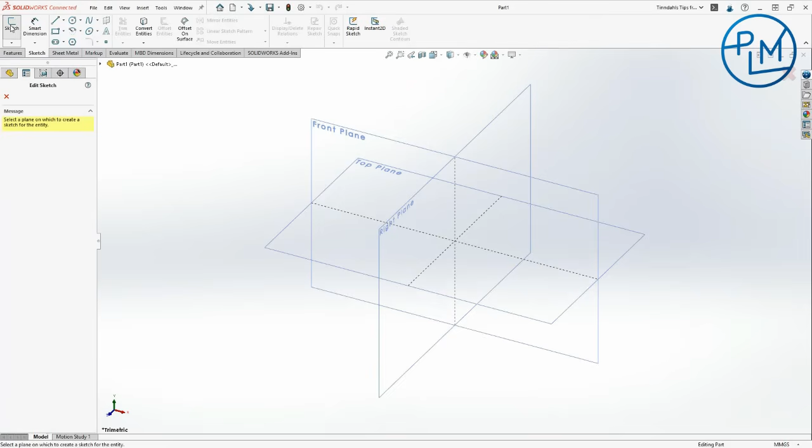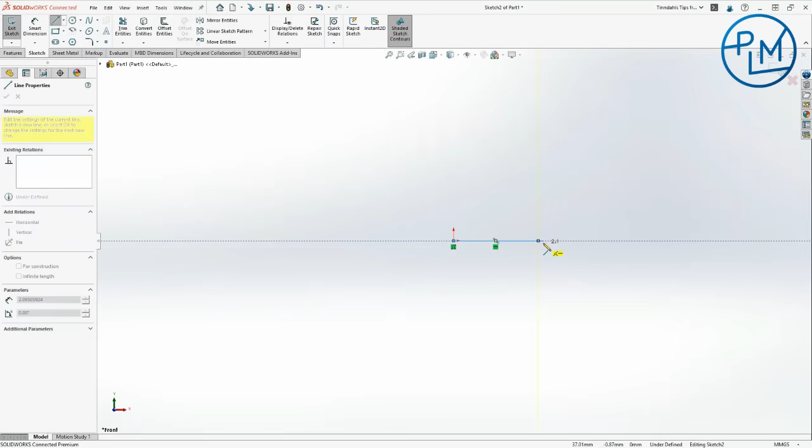Okay. So now I just want to create a sketch. I can of course click here, but I can also create it on the front plane here. As you noticed, it's rotated, and then I'm just going to create a new line by using the shortcut L. So I just create a line here. I think most of you know this little thing where you can just move your line back just a bit, and there we go, then we have the arc.

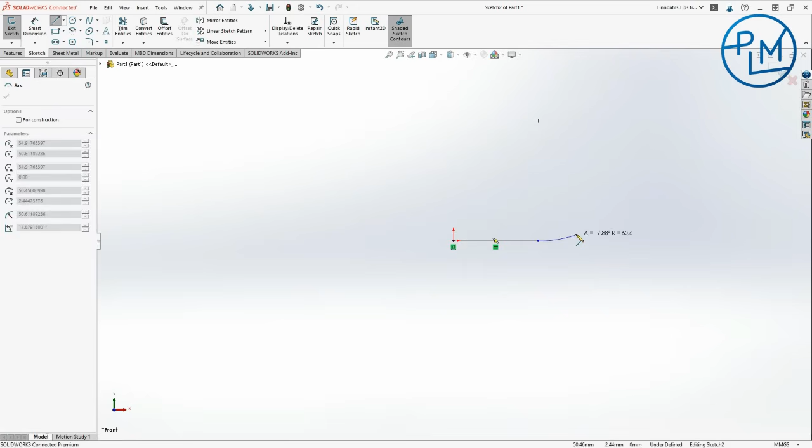Sometimes you cannot always hit it. So what I usually do is just use the A button, which is the shortcut for that. So here, as you can see, I'm just going to create this. There we go. And another line.

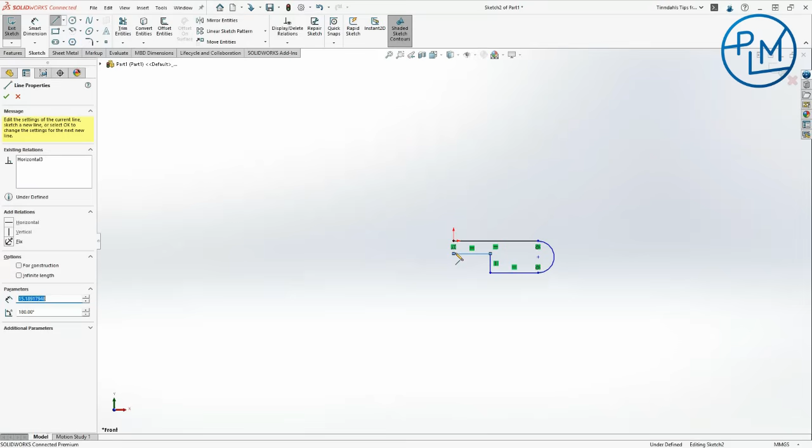Okay. So if I want to create a new sketch, I want to, for instance, use the horizontal. I'm just going to click here. If I hold down the Alt button, you can see on the left side the horizontal and the vertical, the H and the V, are underlined. That means that I can use these shortcuts. So for now, I'm going to use H to create a horizontal line. As you can see, here it starts off horizontal, and if I want to change, I can do that also. So there we go.

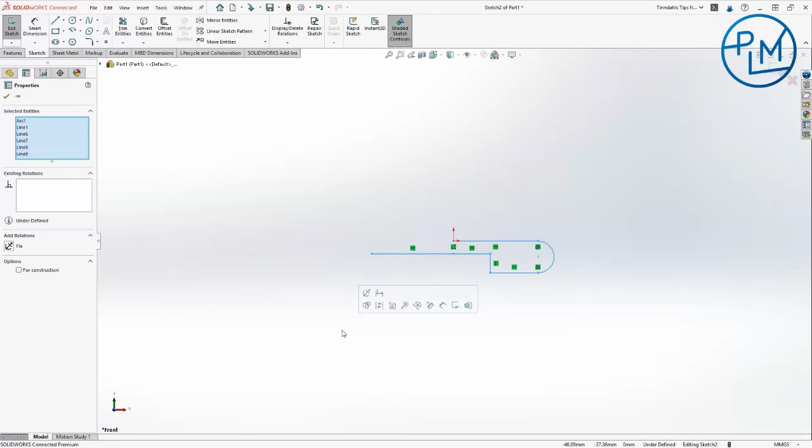If you want to move your sketch, I can of course click here and then go up to move, copy entities. However, I'm a bit lazy, so I'm just going to use the shortcut. To copy a sketch, I can just select everything, hold down Control and drag it. There we go. And instead, if I want to move it, I can just select it all again, hold down Shift and move it.

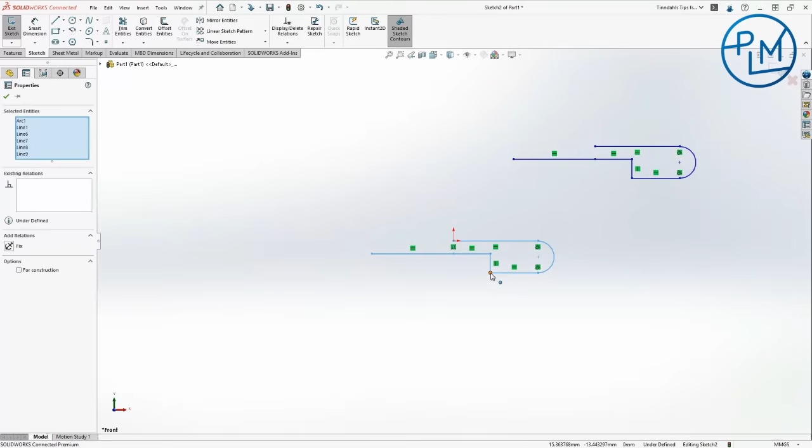One thing to notice here is that it keeps the constraints that you have created, meaning I've constrained it towards the origin, which means if I try to move this, it will stay locked to that. I'm going to use this in a minute.

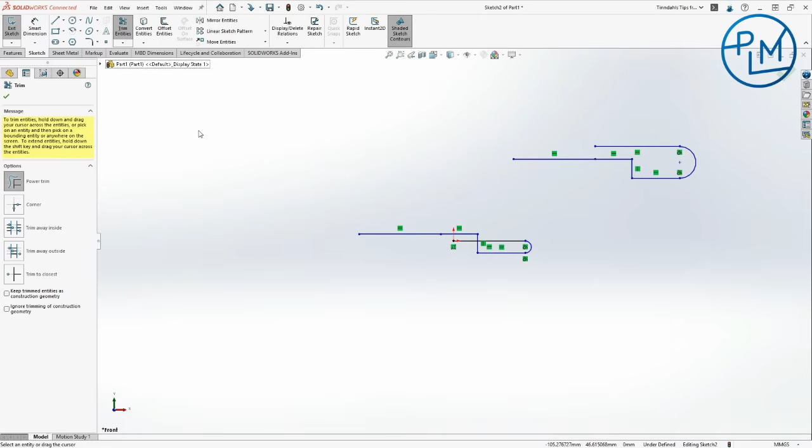Okay. Next up, there is the power trim. The power trim tool is also very efficient. Let's see how we can do this best. I'm just going to move this. Hang on. I'll hold down Shift and move. There we go. Good. So the power trim, as I said, is a very powerful tool. You can of course use it to just drag here and there.

But you can also use it the other way around by using power extend. That's just by selecting the power trim, holding down the Shift button and using extend. These are just some quick ones from my favorite tools here.

I'm just going to check. Nope. The camera's still not working for some reason. Okay.

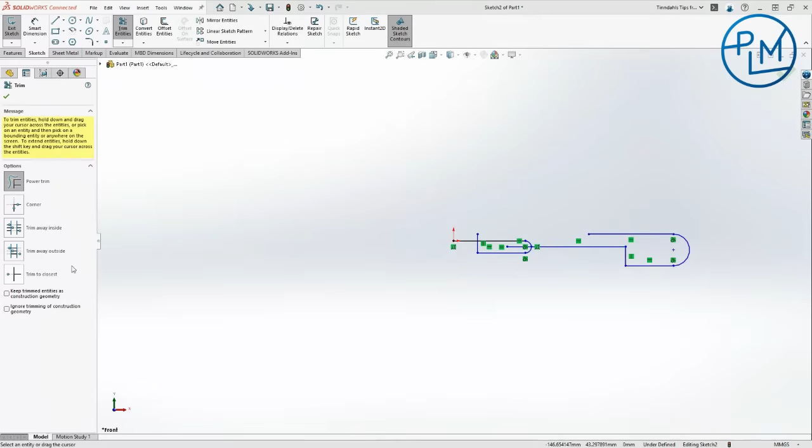So if we just move, okay. So what I want to do now, I want to just show you, I have created this chessboard. For this, I want to create, well, not a functioning clock, because let's be honest, we don't have time for that. But I want to create a clock just to have it to look nice.

So let's see. Go back to our sketch. Okay, so if I just create, this just shows some of my tools. So first, before we do this, I just want to go back to my options within Sketch and enable these ones, so I can get to do a dimension. And I want to create dimension every time.

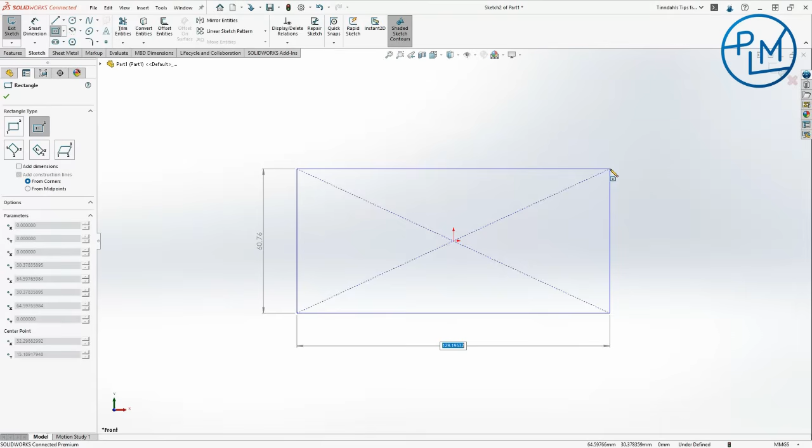So if I go here, and so here we go. Here, I'm not going to use that. I just want to have this one. Just press tab and I can switch between the two dimensions here. And this one I'm going to add to 300. Okay, so that didn't create a dimension, as I hoped. There we go. So next, I want to make sure that the height is always half the length of this.

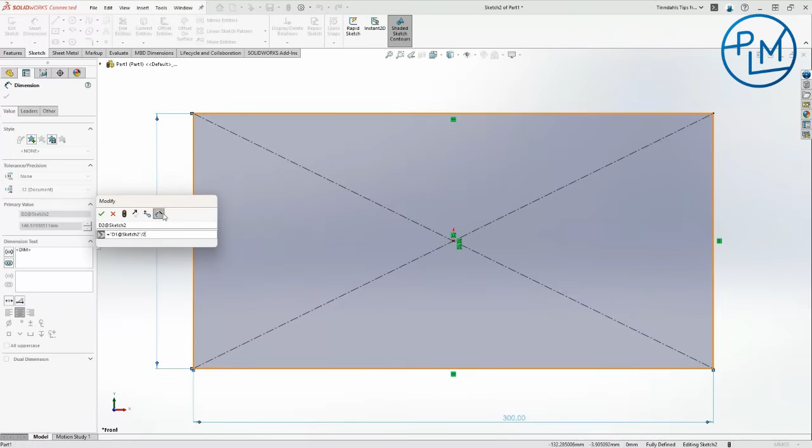So I'm just going to click here, equals 300. And by doing this, it will become a very dynamic model that I can easily change if I want to. So just going to do divided by 2. And okay.

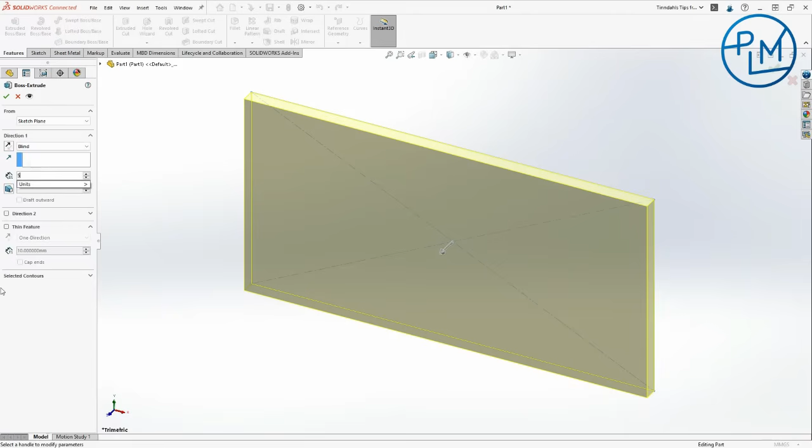Next, I will just be using the extrude boss base feature. Now, I want to create a hollow box for this. So, of course, I could use the thin feature here with one direction, but we're just going to make this, I think 50. No, I think 150. If I want to create a thin feature here, I can also use cap ends, of course. And I just want this to be, I think 5 millimeters would sound good.

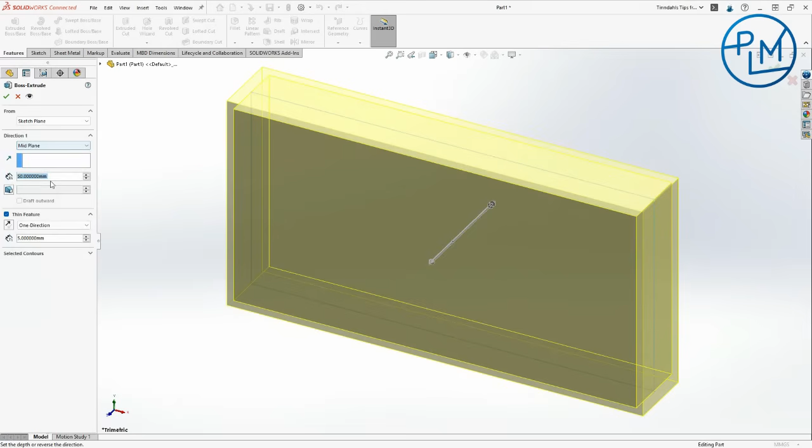Good. I want to create a cap end, and I want to do this in 2 directions. The reason why I'm doing this is because for some reason we can't use cap ends when you have the mid plane feature when using thin features. So I'm just going to take one direction, blind, and there we go, and cap ends. That's good.

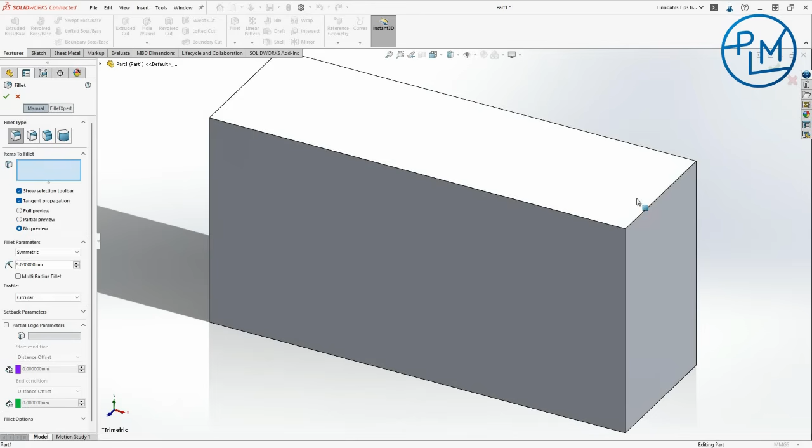Okay, next, I just want to add a fillet here. So if we go fillet and we say 5, I guess that would be good. Just going here and here. I want fillets all the way around here, so I'm just going to say okay, and there we go. Hang on, I think I just made this too small. Going back, so I'm just going to make this 75, I'm saying 100, yes, and 100 again. That looks better.

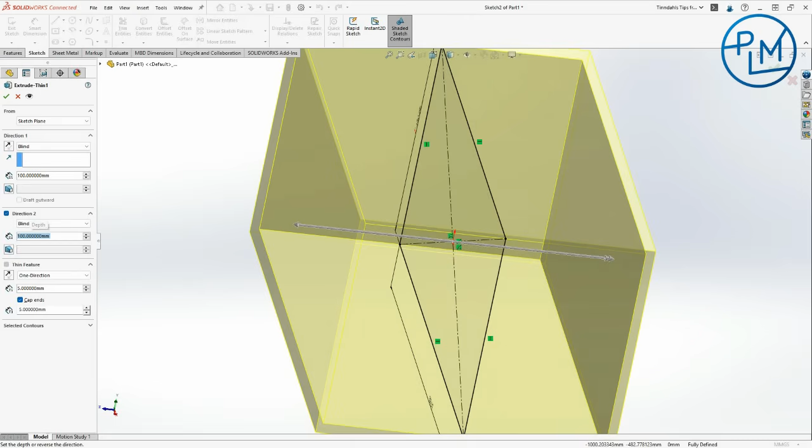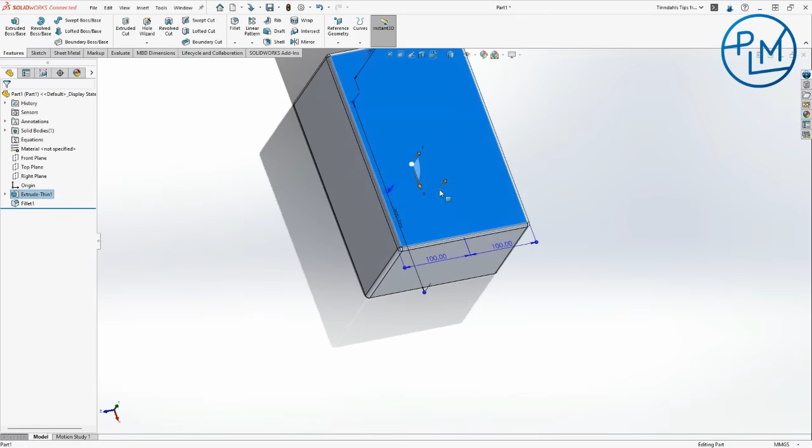Now, within this clock, we can see that this is in fact hollow. In this clock, I want some faces, and I also want some buttons on top of it. For me, I actually want to see if I can use the same sketch for both these holes I want here and these holes I'm going to have here. To do this, I'm going to the top plane and creating a new sketch. There we go.

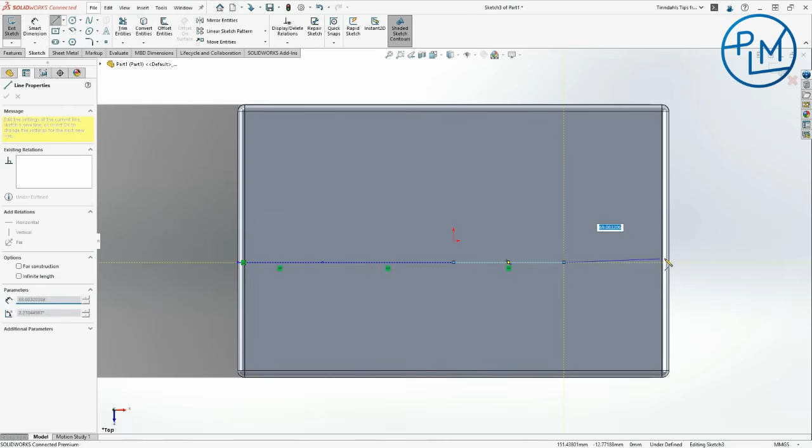So normally what I would do is to create a sketch with, there we go, with 3 points here. And then just make these equal. And I'll make this 15 millimeters. Oh, not 150, 15. 15 millimeters.

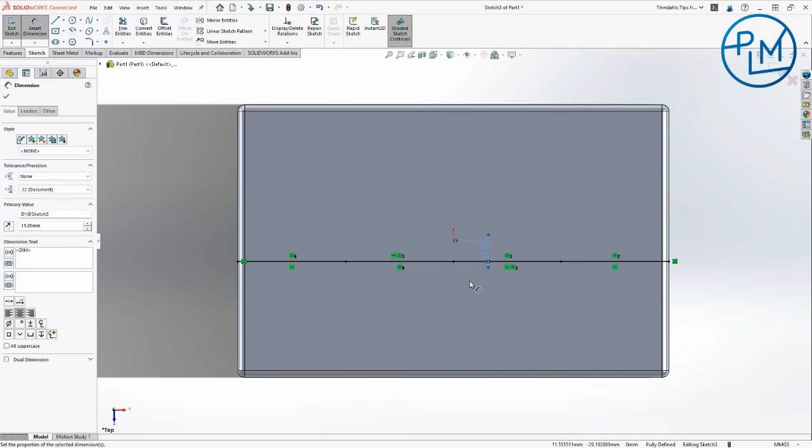This was my previous way to do it, but, I'm sorry if I don't pronounce this correctly, someone asked if I could use a segment line, and of course I can. So instead of that, I'm just going to create one line from this point to this point and make it 15 millimeters.

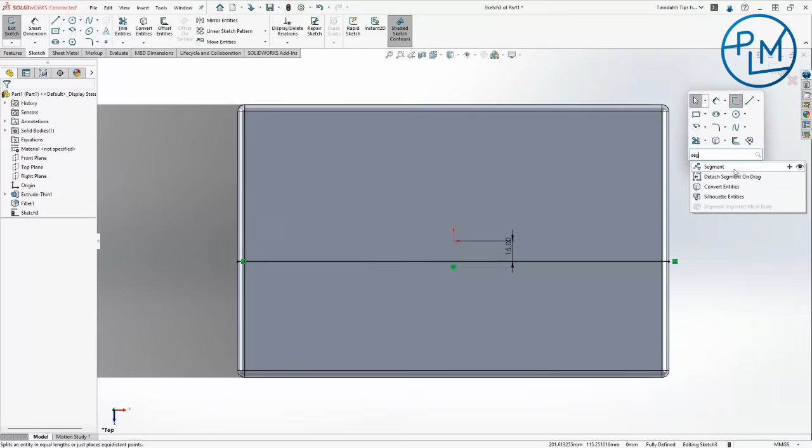What I can do now is I can use a segment. Okay, I'm just going to find that segment line. Let's see here. It's a segment here. And I want 3 points as I had before, so I'm just going to add 3 points. There we go, and that's it. Now this is still one line, but I now have 3 points I can use for my sketch, as I will show you in a minute.

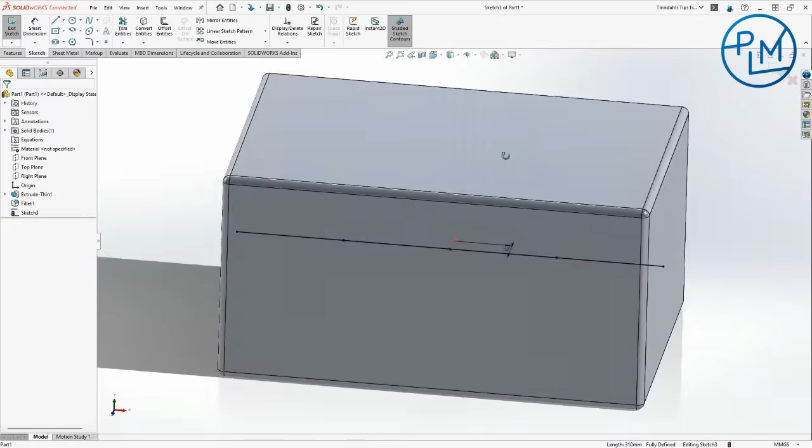So this is basically in the middle, and here's 15 millimeters from the middle. So if we just say okay, and then we're just going to create a new sketch on the front plane. Here we go.

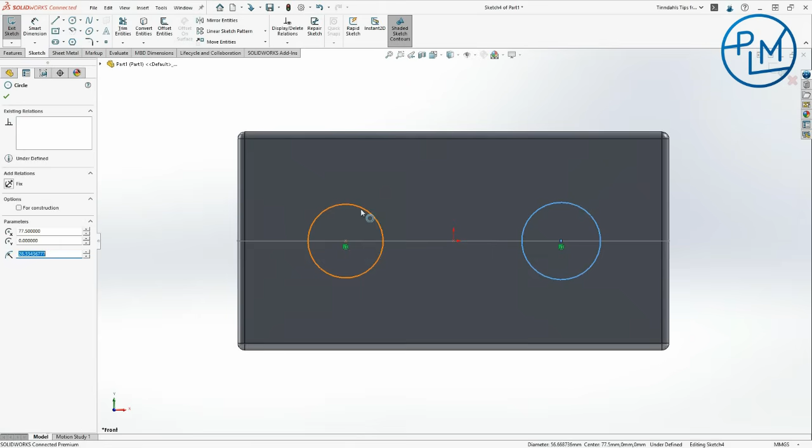Again, we have multiple ways of doing this. The first one is, of course, you can use, create these two and make them equal, and just add the measurement to the one here. Let's go to 100.

If I create this, the great thing about using this is I'm not dependent on any sort of face. So if I remove some faces, it's not an issue. I'm just going to use this from the plane.

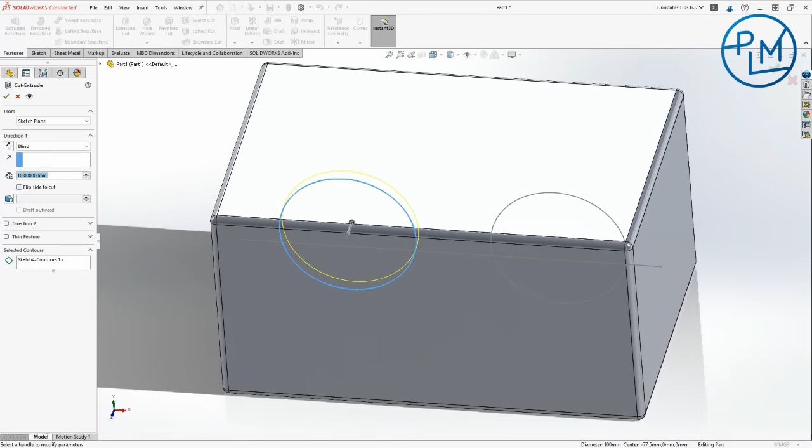So if I use an extrude cut, there we go, just want both of them. And we say through all, and the other way around, thank you. There we go.

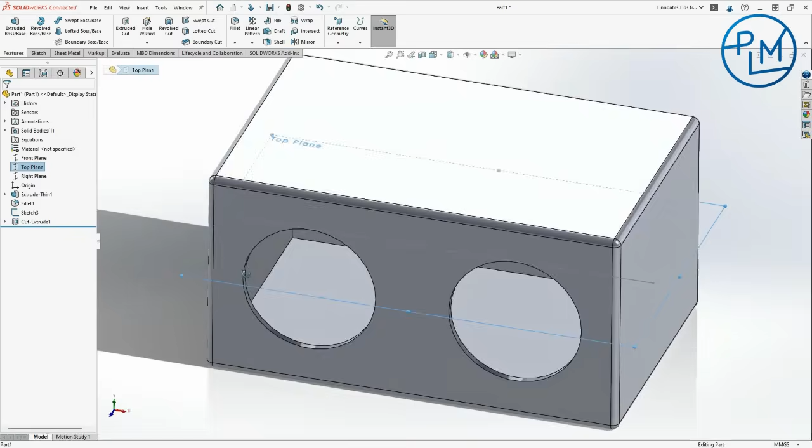Now, for the top, I want some holes for buttons for the clock. Here I'm just going to look into the top plane again. And if we just create a new sketch, it will rotate nicely. So here I'm going to create one sketch.

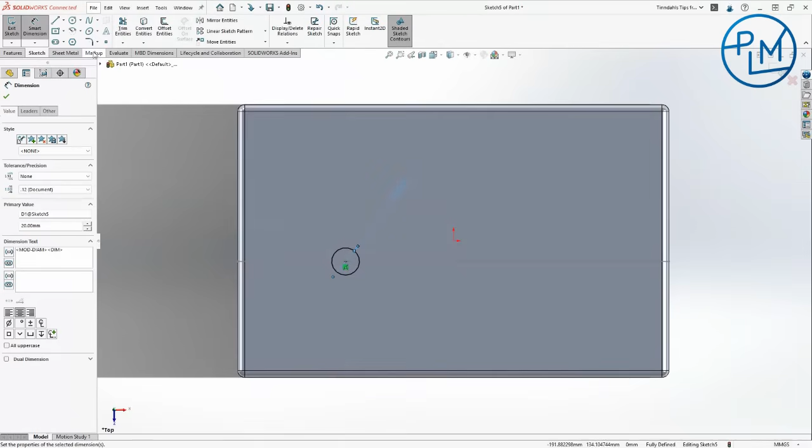This is another way of doing it. I'm just going to add a measurement. I think I'm going to use 20 millimeters. Instead of just doing another one, I can also use the mirror entities, so I can mirror that.

I'm going to mirror this with the right plane. Oh, there we go. The right plane. And there we go.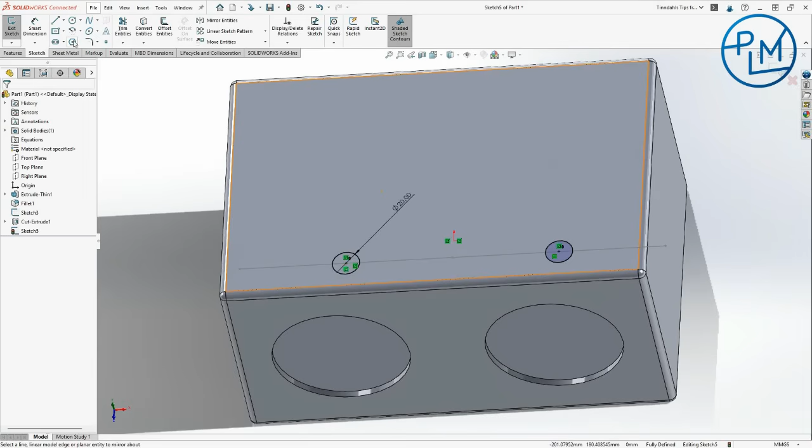Again, I'm using the plane, not the face, to do my sketching. This will also make it easier when in another exercise I'll show you in a minute. So again, extruded cut, and that way through all. There we go.

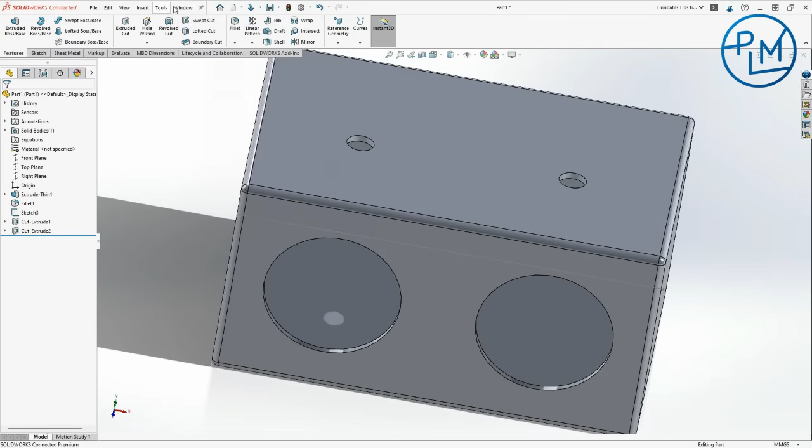What I want to show you next is I have, of course, cheated a bit in advance. So I have created one called Replace Entities. This is basically the same, as you can see, but now I have added a few things to my sketch.

As you all know, designers can sometimes change their mind when it comes to sketching. So if we look at this sketch here, you can see that there's a few other suggestions on how to create this.

Clock. Now I can of course just say okay and make this so like that and like that. Oh, there we go, there we go. And for construction, so we have that.

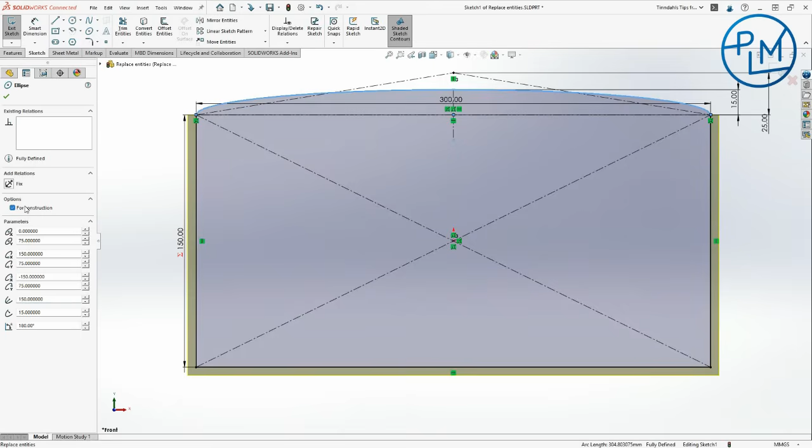Now as you can see, this does not work at all. There's something so wrong here. So I'm just going to go take that away. Okay.

So instead, what I want to do is I want to use the Replace Entity button. So I think I have it here. Oh yeah, there we go. So the Replace Entity, I can select this, and I'm going to make that a construction, and this one I'm going to make that a contour, and then just press that one and say okay.

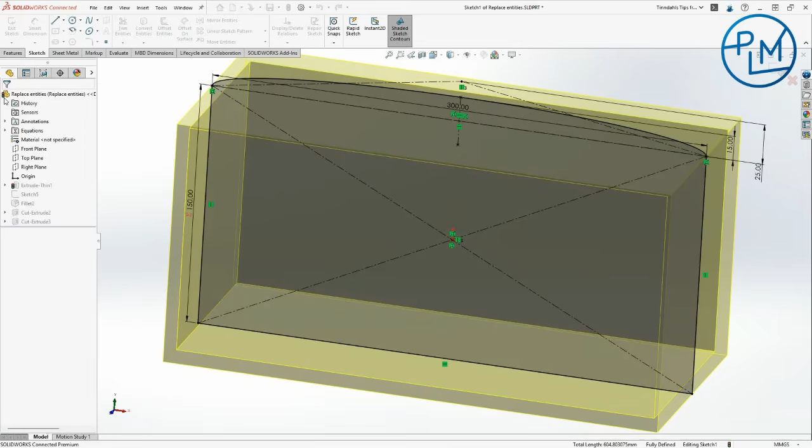So now we have created another look, and this actually also works. That's also very good. But what happens if we just go back a bit? And there we go. But what if I want to use this one?

This has only one line, so I'm afraid that that's one limitation. You can't say, for instance, segment. You can't say replace, and then you can replace one entity with multiple. So what we're going to do instead, we're going to go into the Tools section and go into Sketch Tools, and we're going to use, see if I can.

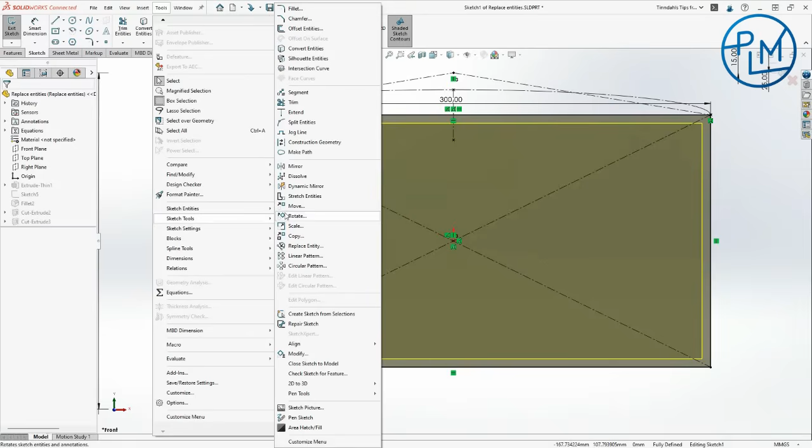We're going to use Split Entities. This actually gives me the option, so I can just say okay, I want to split my entities, for instance. It doesn't matter, actually, where I want to split it, as long as I have the same number of lines. So I'm just going to split that. Okay, now my line is 2 different lines.

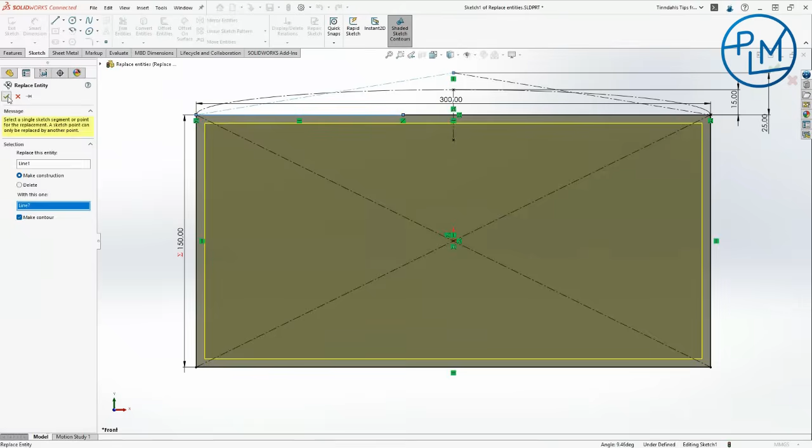So that's ready. And if I take my Replace Entity, I can say I want this one. Make construction and make contour, great, and that one. Okay, and again, this one replaced with that one.

So as you can see, we already changed the look here. Now, as you will, of course, notice, the fillet does not appear on that. That's because it's a whole new face that has appeared.

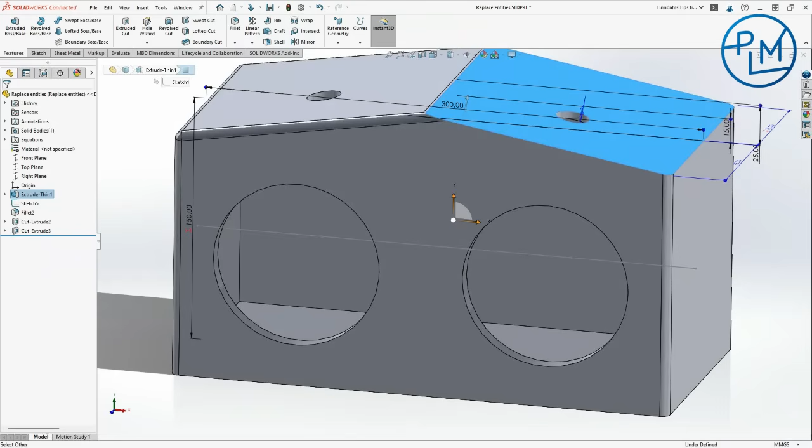So instead, we just need to correct this. I can, of course, do this. Let's take a drag and drop. Okay. Nope. That's it. So if I just take this and see if I can do that.

Yeah, there we go. Just hold down Control and drag and drop it. Then you can, okay, then maybe we got it too much here. So we're just going to go here, and then we need to.

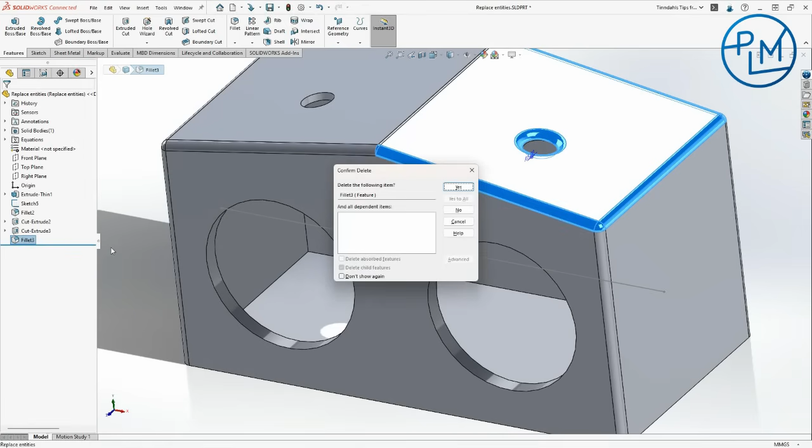So what we can do instead, so that's not good. So what we can do instead, actually, is just we take this, delete. So we just roll back, take our fillet and drag it on, and then just create our holes.

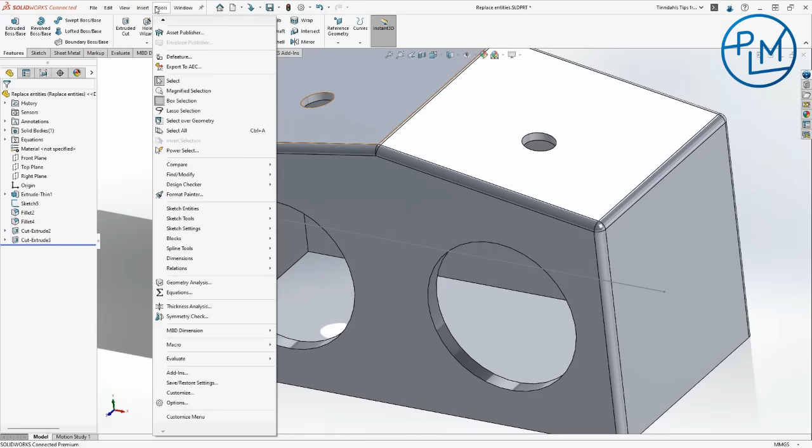So that is one way to use replace entities. Another way that I actually want to show you is one I actually think is very overlooked. So as you may have already guessed, I have already created a chess timer here. That looks nice. So if we look at, see if I can find it here.

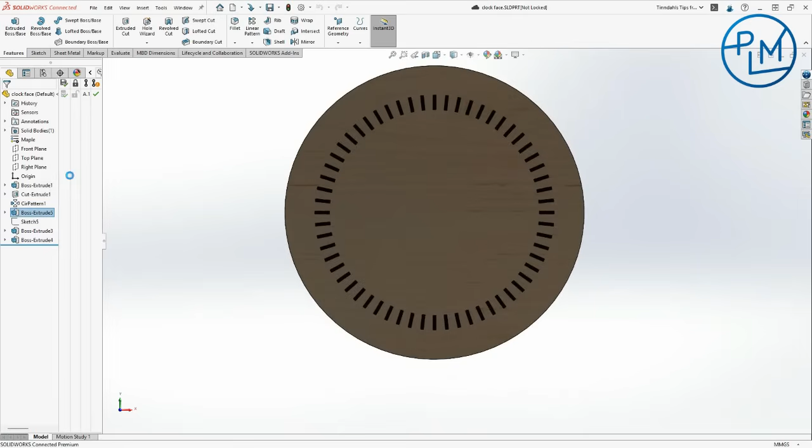Okay, so since if we look at, let's take this one, let's go to the example. So we have the circular pattern, and there we go. Yeah, so one thing you actually can use with this, if I just go, actually use it to...

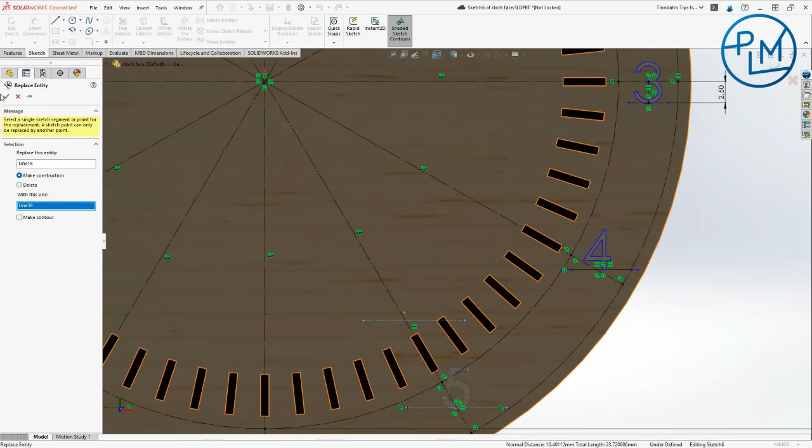Change your text also. So if we just go here, and if I take, for instance, if I want to move this up here, I will just use the replace entity again. So that one, and I'm not going to make it contour, it should still be like that. And there we go. As you can see, it's a much easier way to move your text file if you want to, but I'm not going to use that here. So just go back and okay.

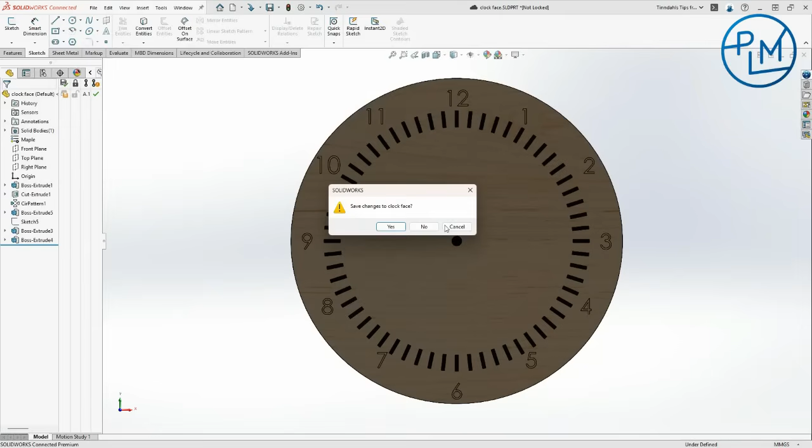So moving on, let's look at this clock that I've already created. I'm just going to go back here, shut this down. Nope, don't want to change anything.

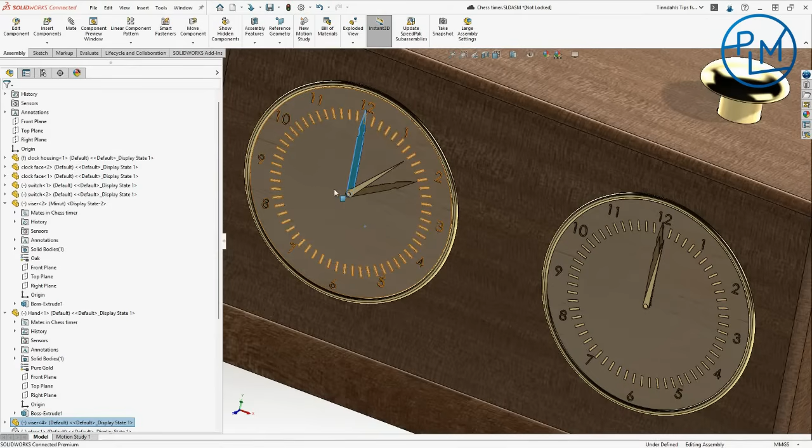Okay, so this clock face, as you can see on this side, I've already created - hang on, that's the second hand. As you can see here, the second hand, the minute hand moves one minute whenever the second hand moves a whole round. And the same thing also goes with the hour hand. If this one moves for one, there you go, then we just move for, as you can see, it moves exactly like a clock. I don't have an animation with that, but it should be doable.

Now, what I want to do, I want this clock, I want this one. As you can see, I've created an easy way to make these two move, so when this one stops, that's basically how a clock works, that you get to start it. So if we just go to our, I'm just going to delete. So there we go, okay.

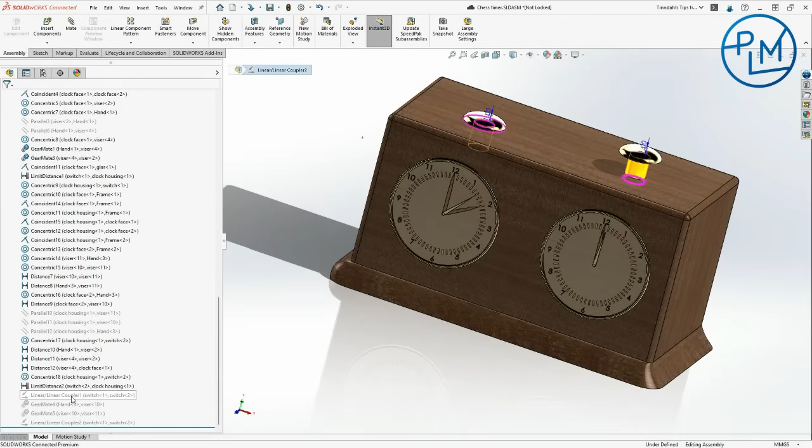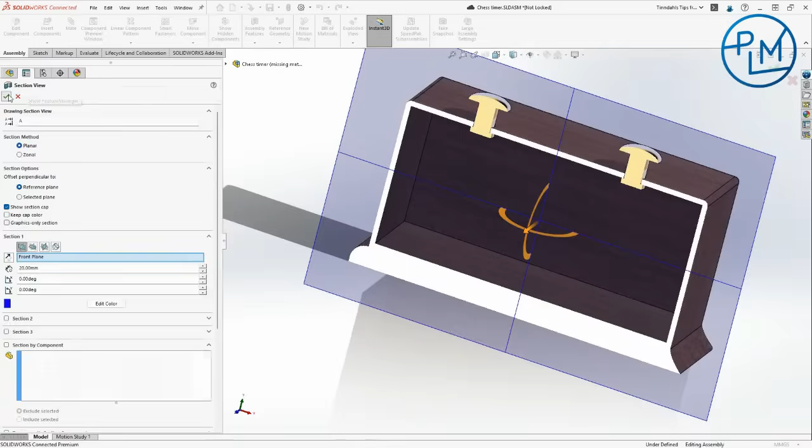So how do we do this? As you can see here, I've created a limit distance mate here. I'm just going to make this. There we go. And yeah, so as you can see here, I've created a limit distance that only allows it to move this close. So there's a limit there.

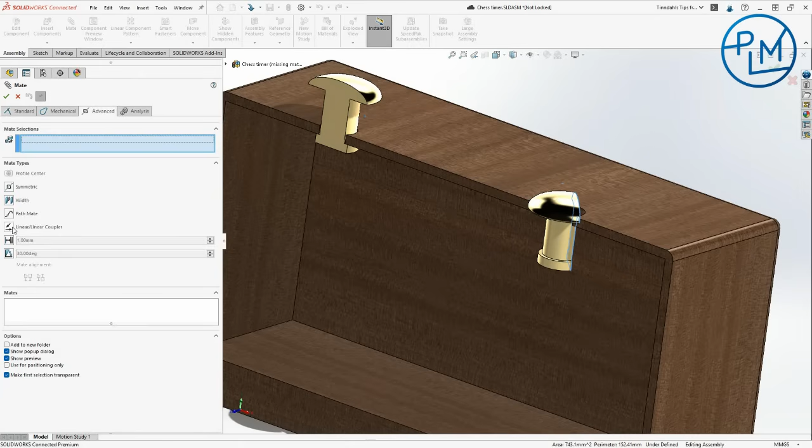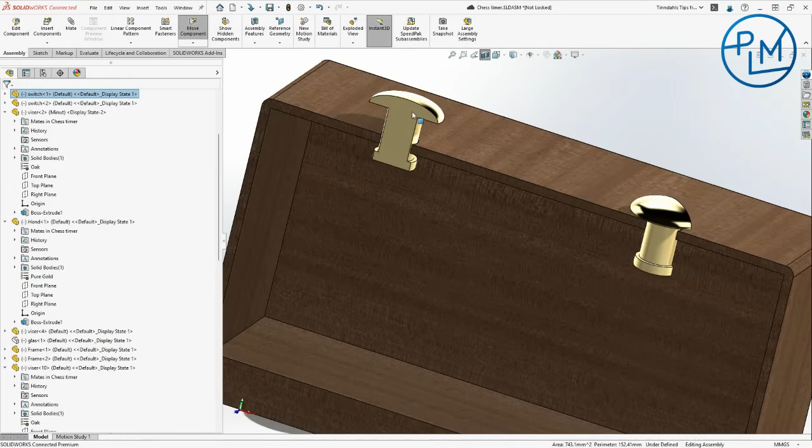That's good. So if I want these two to move accordingly, I move this one down here. So what I can do is I can go into mates and advanced mates, and then use the linear coupler mate. So first I'm going to select this, and then we're going to select this. See, right now they're moving in the same direction, so we don't want that. We also want them to move 1 to 1, we don't want any ratio movement. So we're just going to go here. That's it. And so if I go down, this will move accordingly.

Next, we have the clock. So right now there's no connection here, this just moves pretty much as it wants to. And let's see, I've just determined that the large hand is the minute, this one is second, and this one is hour - the hour moves every hour. So in order to make this move according to standard, I'm going to use the gear mate.

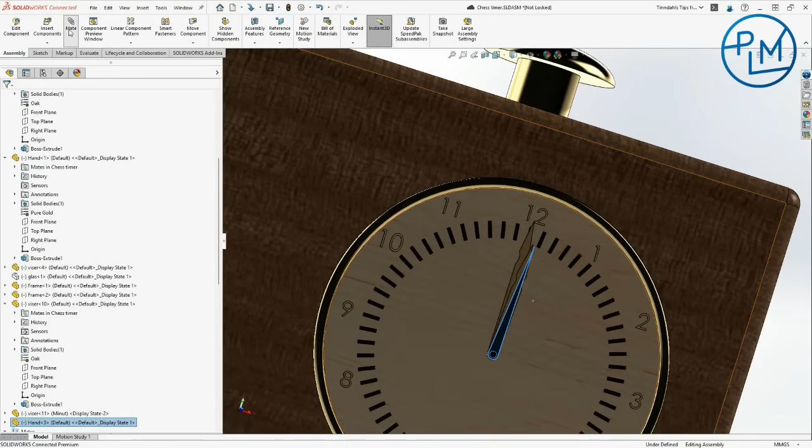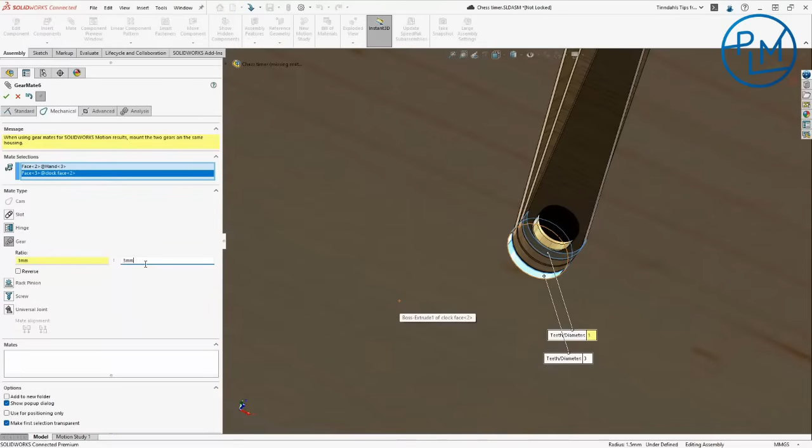So if we go into the gear mate, mechanical, I'm just going to select gear. So first I want to make sure I have selected the second, and then that one. Okay, so we say ratio 1 to... no, we say ratio 1 to - since it is in seconds, one of them has to move 60 when the other moves 1. So we're going to use ratio 1 to 60 and see how that works.

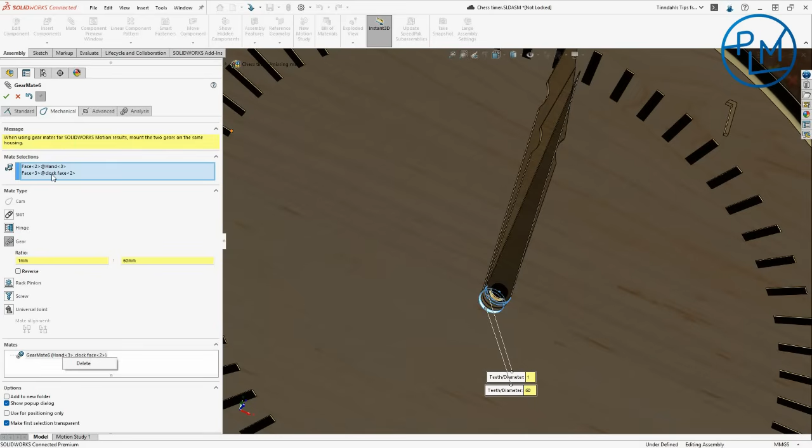See if I got the correct one. Oh, that didn't work, let's see. So, oh, that's the clock face. There we go, I think. 1 to 60.

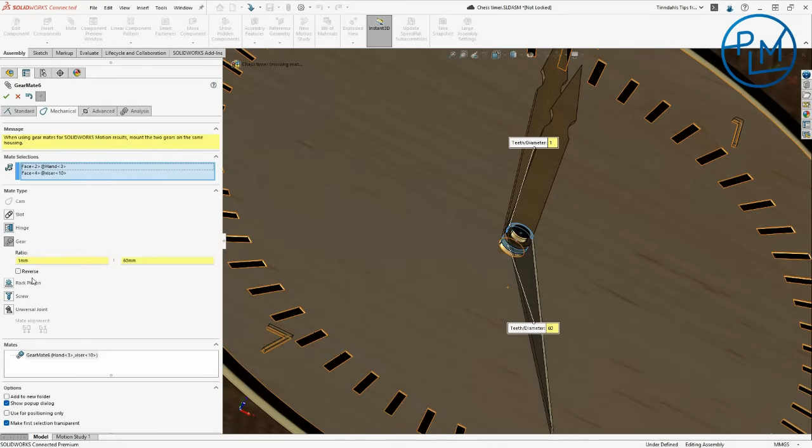So if we, okay, then let's just move backwards, so it's going to go in reverse, I think. Let's see if that works. So there we go, so now it moves accordingly. And the same thing actually goes with the other one - we just say this and this, but then we want to use a gear mate, and it's 1 to 12, because there's 12 hours, there's 12 strokes on the clock, so we use 12.

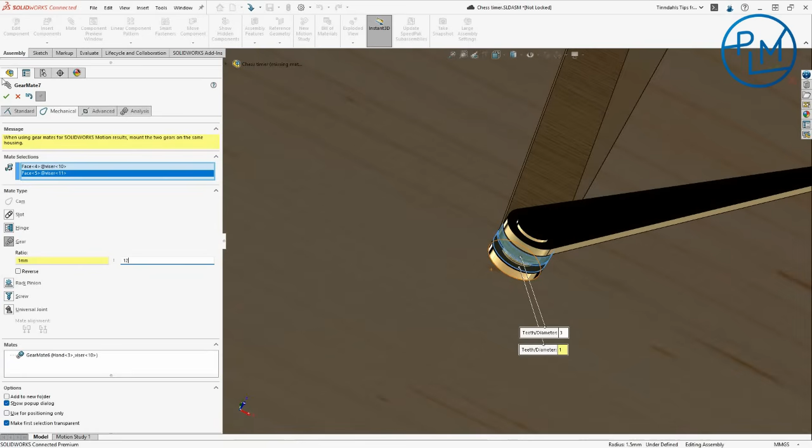Something is moving backwards, I can see, so I'm just going to reverse that. Okay, hang on, so now we just need to... if I move this, you can see this moves exactly like a clock.

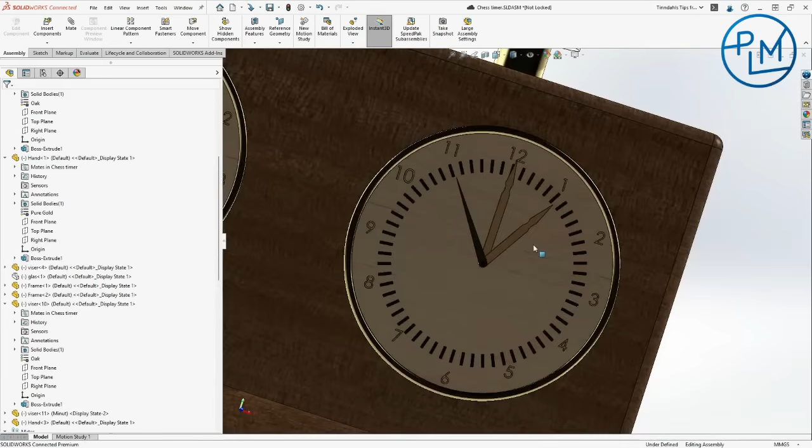Once this is done, we are ready to use this within our assembly. So if I go to the chessboard here, I already have one ready for you. This is a default that I'm going to use, so we're just going to have all these.

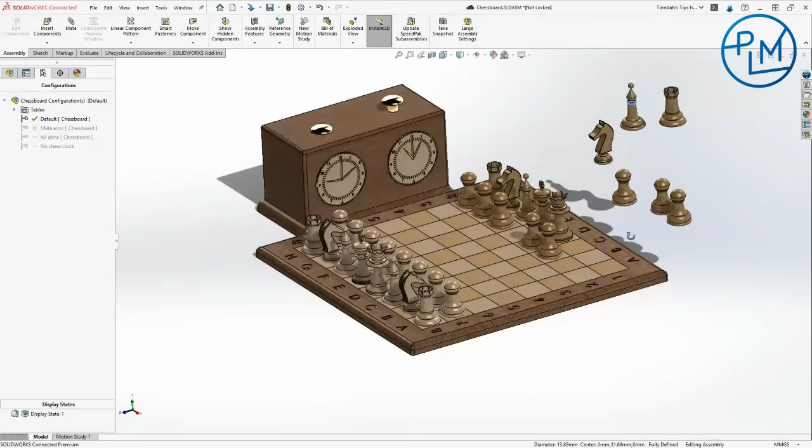As you can see, these are not attached in any way, so I'm just going to drag all these out here. There we go, this is a good example. So if I want all of these to be on this chessboard, the easiest way to do that is actually to hold down this and then ensure that you create multiple mates at once.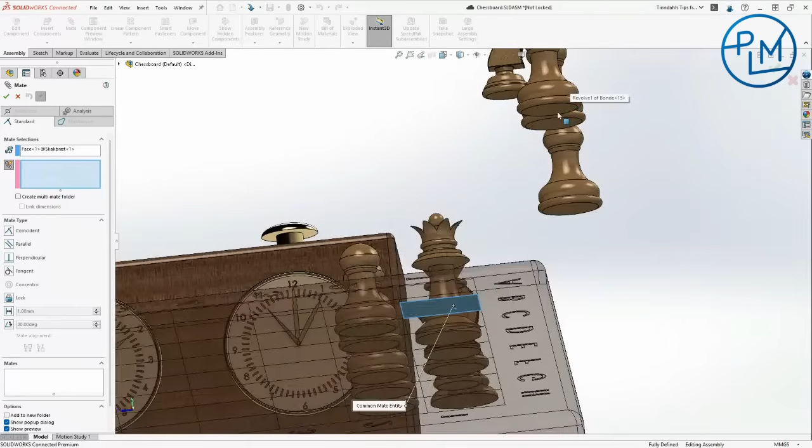Here I'm going to select the chessboard and then select all the components I want to mate to this chessboard. So I'm just going to select here, here, here, and there we go. So now these will of course be... you can adjust these the way you want to be located in the proper place.

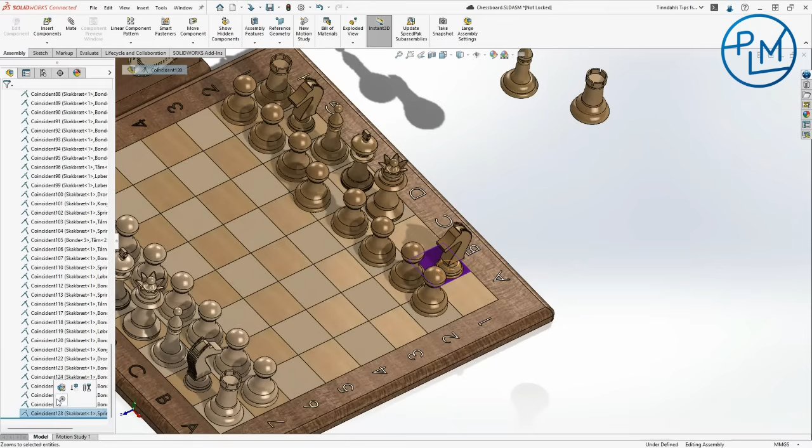So let's see what else we have. If we look at this one, actually looks kind of great. I'm just going to delete these mates. As you can see, it creates multiple mates when doing this. So I'm just going to press Control Z, and there we go.

So if we, for instance, look at this one, mate error. Oh, there we go, this looks pretty okay, but if I go into my assembly, I have multiple mate errors.

Now, one issue with this is, this is kind of easy to look into, but let's say that we have many more errors with the mates. So what we can do is we can sort this just by clicking, go into group mates and use group mates by status. By doing so, we can easily find out which ones are solved, which ones are coincident, which are defined, and we can then easily clean up.

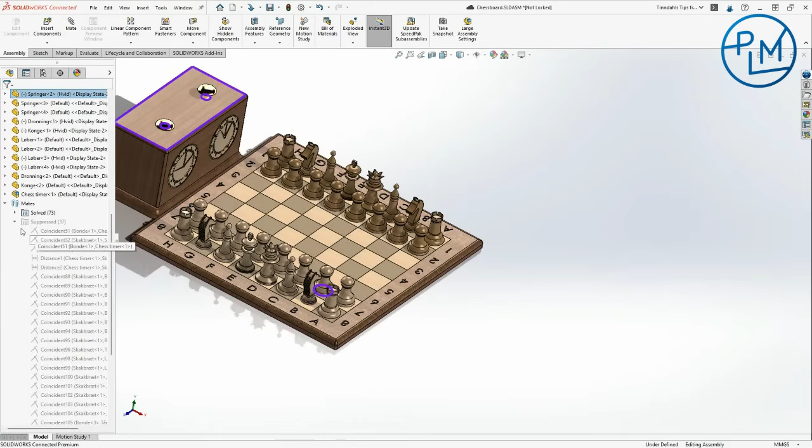For instance, I just want to, there we go. And now I actually only have solved or suppressed mates. That's kind of easy to find. That's also one thing I would like to point out.

Sometimes it's a good idea just to use the suppressing of mates, not to delete them all at once, because you don't know if you're going to have to use them in another configuration.

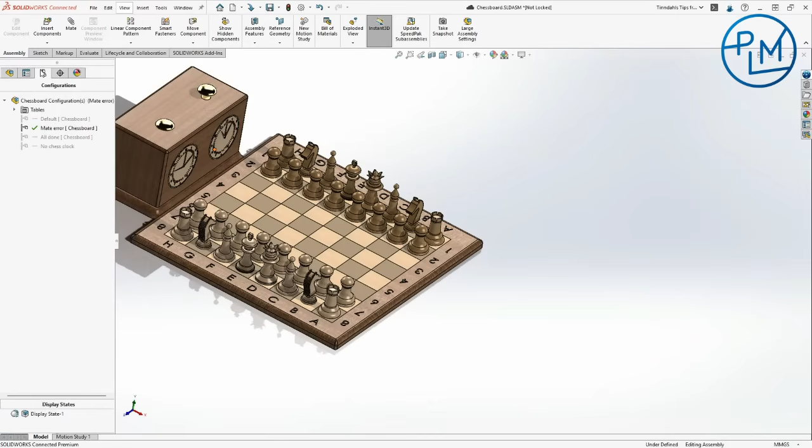So let's see, if we also want to create an exploded view of this, let's take this one. So this is all done, everything is located as it should be. So what if I want to create an exploded view?

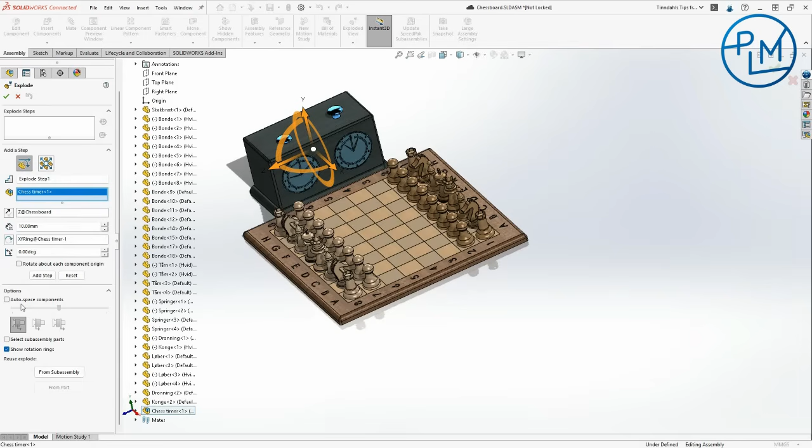Most of you also know it's quite easy to create a new exploded view, and then we can just say whatever we want. But what if I already have an exploded view? I have an exploded view here of my chess timer, so we're just going to explode from subassembly.

So I've already created one... okay, maybe I didn't have it. Okay, so I didn't have a subassembly exploded view on this for some reason, but you can easily reuse your exploded views if you have one, just by using reuse explode.

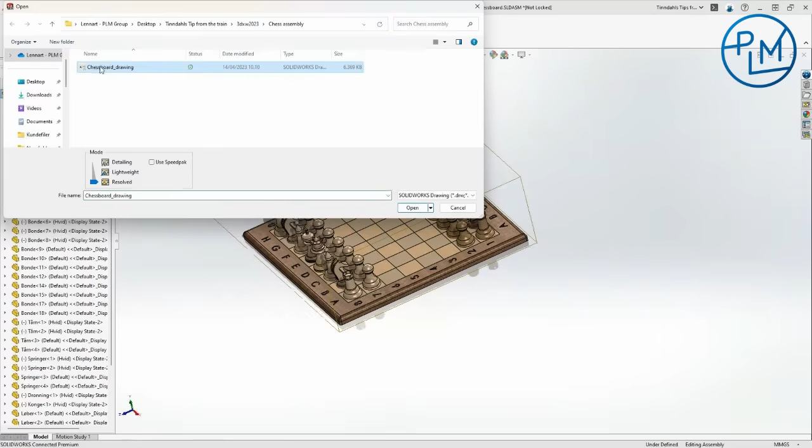So if we move on to our drawing, I just want to show you a few features from SOLIDWORKS 2023. So if we move on to our drawing here... okay, there we go, just open the drawing.

One thing that I think is very cool within SOLIDWORKS 2023 is the ability to sort your drawing, to sort your bill of material. For instance, if we want, well, we only want something that has mahogany in it. So we're going to do that. And then, well, that's just a chessboard.

So that's basically, let's see, what else do we have? Maple, maybe, I think that's, yeah, then we have all the different chess pieces that have maple, and this will also be shown. Let's see if I can do this correctly.

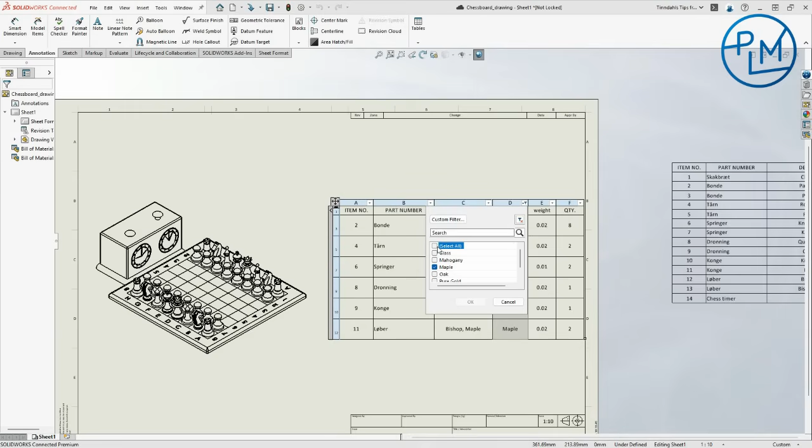So if we just quickly go, say all, press here, no, it's that one, and then press Auto Balloon. This is okay, so this is kind of big, and then press OK. So if I, for instance, say okay, I only want mahogany, I only want oak on this, then I only get only the ones that's on this bill of material that is shown within your balloons, which is, I think, is quite cool.

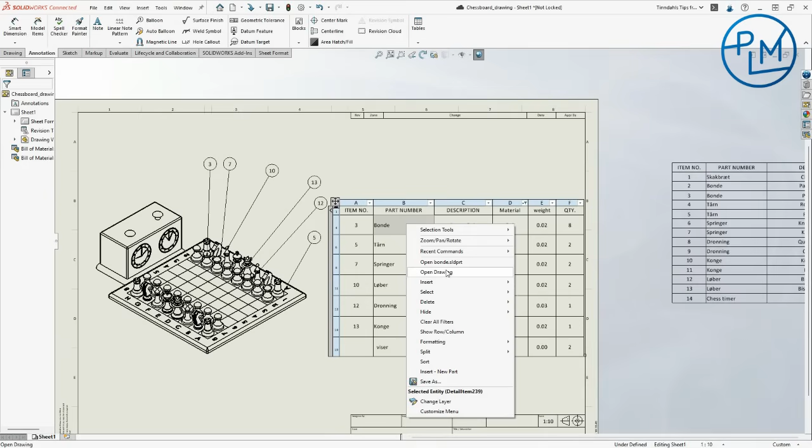One more thing that I also want to show from 2023 is actually the ability to open drawings from within a drawing. So, for instance, I don't have a drawing for that, but if I had, I could actually open the drawing from another drawing. That is also a new thing.

And I think that is all for now.